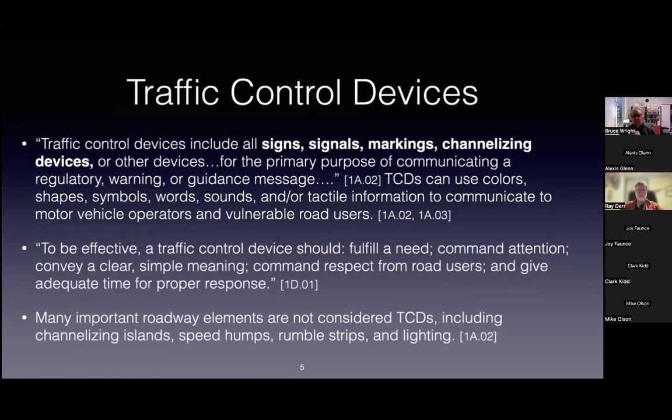By and large, the MUTCD does not require the use of a particular traffic control device. It just talks about if you're going to put in a traffic control device, this is how it should be used. But the implementation decision should be made by an engineer considering the safety and operations for all users. Another item is that a traffic control device that doesn't meet the requirements of the MUTCD cannot be used without an approval to experiment.

There is a process—it is not an agile process, it is not an easy process—but agencies can request approval to experiment, and there is a way of going about that so they can try new things.

Once the MUTCD comes out and gets updated, it takes a while for all of those devices which may no longer be in compliance to get updated. So it's up to the agency, whether that be the state, the county, or the city, to set up a program—typically on the maintenance side—to go out and, when they are refreshing their traffic control devices, bring them up to standard.

Traffic control devices in the MUTCD have to be in the public domain, because the federal government doesn't want to be putting out a requirement that everybody go out and buy a device from a particular vendor and put them into a proprietary situation there. So that's where that comes up.

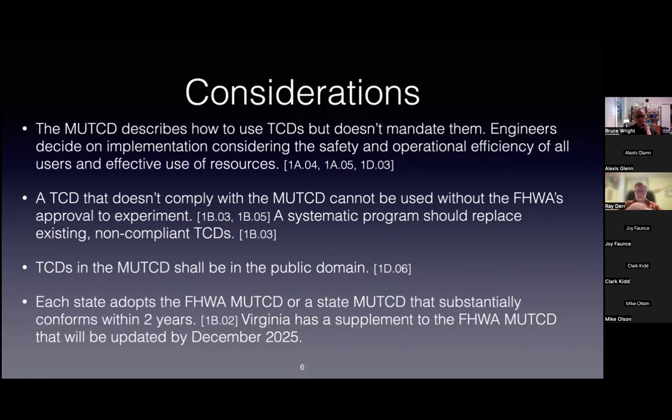Let me just pause here real quick to see if there are any questions about the purpose and scope of the MUTCD. Yeah Ray, just let me chime in—questions are welcome here, and while Ray's doing his talk, he said he would take questions on each of the slides. We'll try to get through them quickly, but if you do have questions, you could either raise your hand or put the question in the chat, and Alexis and I will try to get to it. But go ahead if there's any questions.

Now's a good time in general. The rest of it's going to be dealing more with specific devices, so I think you're going to be more interested in that. If not, we'll move on.

Mary has a question asking if the signs are expected to conform to the Americans with Disabilities Act. Yes, that is certainly required. Everything on the pedestrian side has to comply with ADA. That is a civil right, not to be questioned. Agencies just have to do it.

One of the big things that's taken several years is to implement curb ramps. That's been a real resource problem for a lot of agencies. But at this point, hopefully we're pretty well along as far as getting all sidewalks having curb ramps at all intersections. ADA is required, I think that's it.

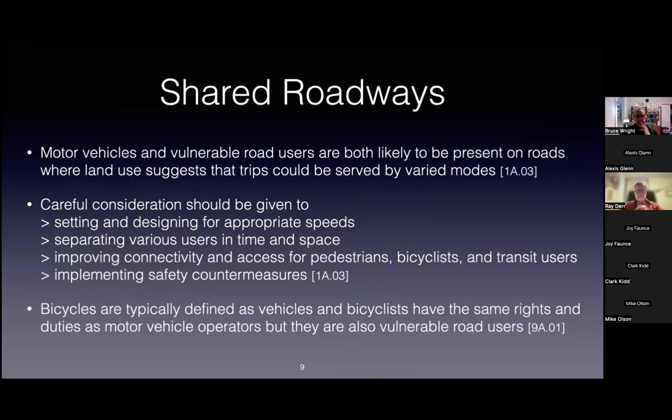One of the big changes in this manual is dealing with speed limits. If you had any knowledge of the MUTCD, you're probably familiar with the 85th percentile speed and how critical that was in terms of setting speed limits. With the new manual, it specifically says that on urban, suburban arterials and rural arterials going through a small town, the 85th percentile is not as important as it has been in the past.

So the agency, the engineer should be looking at alternatives, taking more things into account than just the 85th percentile speed in terms of the speed limit, and also should be looking at speed reduction countermeasures, because just setting a speed limit really doesn't do much to change how drivers proceed. We really need to do something more to get them to travel at a reasonable speed, the speed we'd like for them to be, and certainly as bicyclists, the speed we'd be more comfortable with them at.

Ray, does this apply to VDOT, or do they have to adopt it formally in the next couple of years? Because we would love to see them use this now. They do have to adopt it, they have 2 years to adopt it.

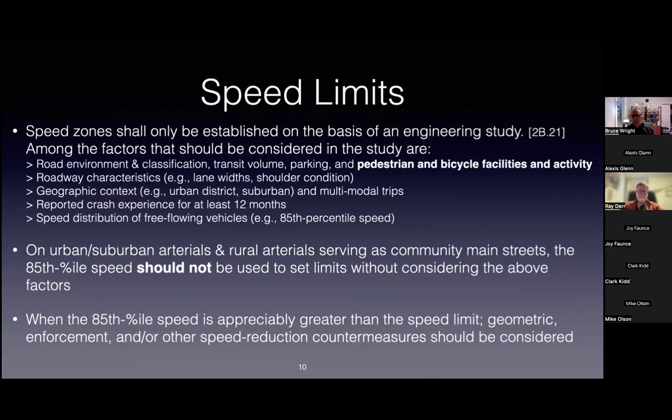So a couple of things here about bicycle facilities. As you know, green colored pavements and markings are designated for bicycle lanes and facilities. There is information in the manual on, if you have a situation where people are parking in the bike lane, you can put up some signs to try and discourage that. There's a diagram talking about angled back-in parking, and it says it's common to improve visibility of bicyclists. I'm not sure if that's new, but I would think it is. I know some places have done angled back-in parking to help with the visibility.

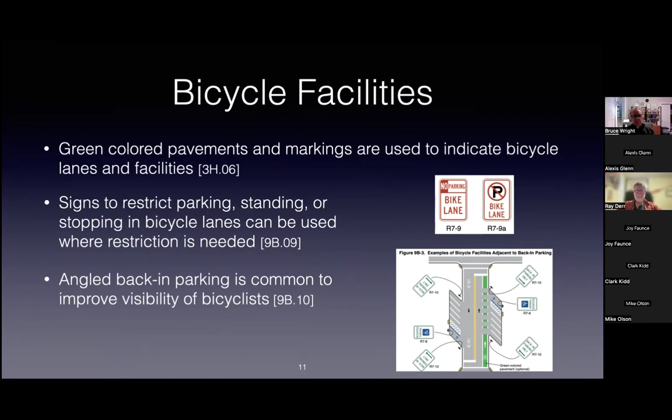Also covers buffer separated lanes, and gives several examples of those. I've got a couple here at the bottom. You guys know the county a lot better than I do, so I'm not sure how much mileage we have as far as buffer separated lanes in Fairfax County. But certainly that is a much more comfortable, much safer, much better environment for bicycling, and it's a lot more likely to get people out there using the facilities.

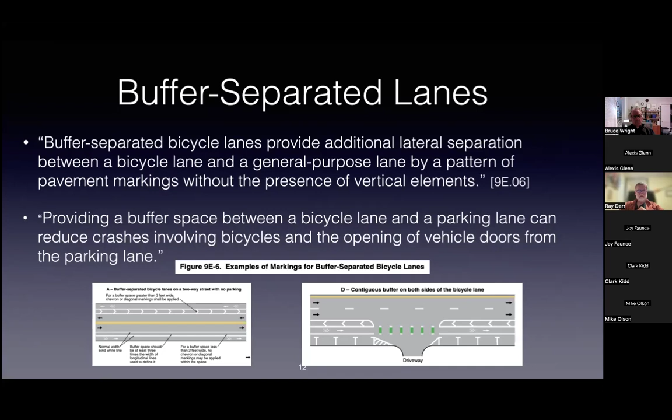And then separated bicycle lanes, like buffered, but providing even more separation, a little more as far as vertical elements to help separate the bicycles from the motorized vehicles. One of the things that happens here, in the little diagram on the right, it does bring in the protected intersection. Probably seen these from the Netherlands, other places. So you can actually carry the separated bicycle lane through the intersection, closer to the intersection than the crosswalk. This is something I'm sure is new in this manual.

Separated bike lanes are what we want to see, and VDOT has been very reluctant, partly because they claim that maintenance is more difficult, which it might be, but if they had the right equipment, it wouldn't be. So I think they're changing gradually, and there is one now in front of the Vienna Metro station that is truly separated, but it's one of the only ones. So hopefully before too long, we'll get more of these.

I think so. But I will say that that separated lane by the metro station was not cleared of ice and snow. So when VDOT says that maintenance of it costs more, I suspect so, because to me, at least in my knowledge of it, unless Mother Nature melted all that snow, there was nothing done there to remove snow from those lanes. Yeah, that's a big problem.

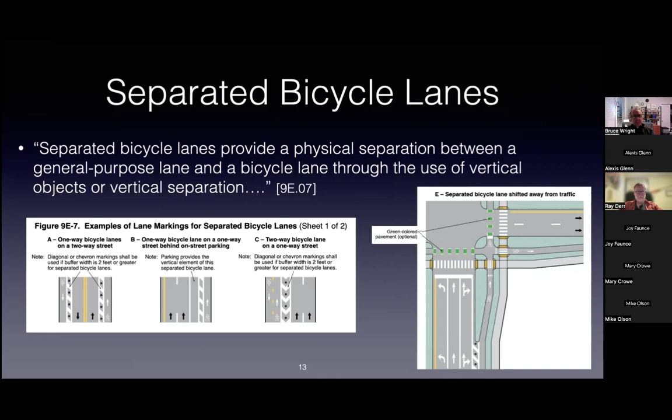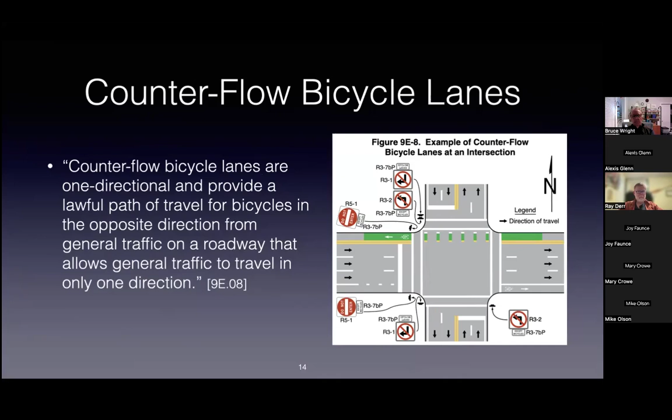Counterflow bicycle lanes are covered. I'm not sure we've got a lot of those - they're more in DC, but in the district, bikeway signs, there is a lot more in terms of that.

As far as laying out standardized signing so that, as you're traveling around, you have a better sense of where you are - so once again, like the cross-county trail, that is a sign which has to be in compliance with the MUTCD, and I'm sure it is.

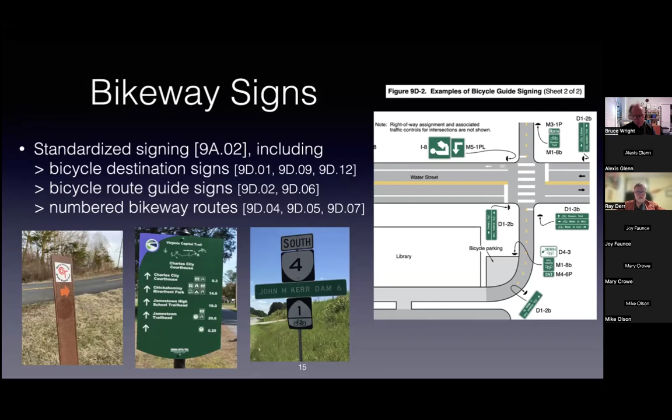So, signalized intersections for bicyclists - I'm not sure if this is new or not, but basically as far as doing the analysis of whether a traffic signal is a good idea, bicyclists can now be considered as either vehicles or pedestrians. So it gives another option for doing that analysis of whether a signal would be an improvement.

There is more on the bicycle signal faces, and they do cover what the meanings of the steady and flashing bicycle signals are.

And then they've got several pages of examples of different types of bicycle lane transitions as they approach intersections. These are not just for signalized intersections, but it was a convenient place to put this type of information. So I'd say there's quite a bit more now, including there on the bottom right, where you've got some separated bicycle lane and how to handle that with right turning traffic.

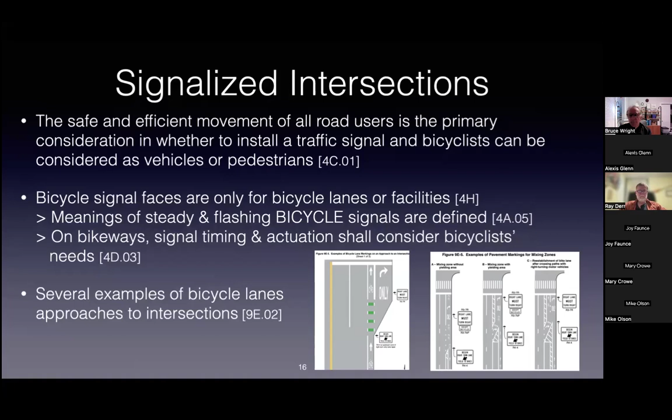Bike boxes are covered, both for turns and also to get in front of the vehicles to be able to get out there quicker. So those are laid out.

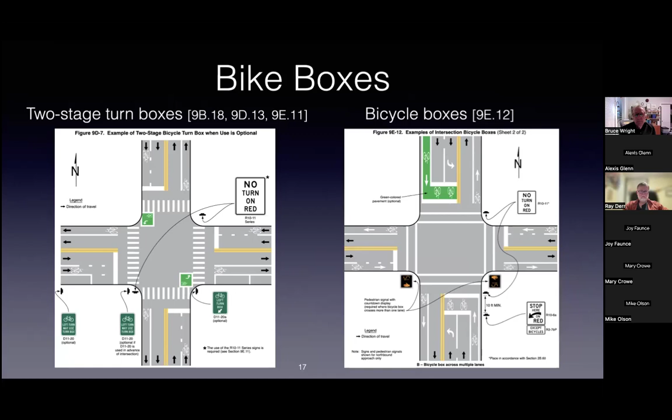So once again, the MUTCD doesn't require that any of these devices be done, but just having them in the manual is going to help when you are talking to the agency, in terms of pointing to an example which can help with the discussion.

For stop and yield intersections, where a trail or something is crossing a street, the first couple paragraphs talk about how in some cases it might be worthwhile or beneficial to give priority, the right-of-way, to the bicycle traffic rather than the vehicular traffic. And that's something I think could happen in several places around here.

The one at the bottom there - when priority is assigned, the least restrictive control that is appropriate should be placed on the approach. I know this is something we just talked about in terms of the proposed state law, but there are a lot of places where stop signs are up and yield signs would be definitely sufficient.

The stop signs are just being ignored by me and you and other bicyclists, and particularly where you've got good sight distance, there really just isn't a need. I'd rather see those stop signs reserved for places where you actually do need to come to a stop to be able to see the traffic.

Quick comment on the first item, giving trail users priority - folks at Bike Falls Church are trying to get that implemented on the W&OD Trail, where there's a number of very low volume neighborhood streets that the trail crosses, and there's more traffic on the trail. So this will certainly help with that argument.

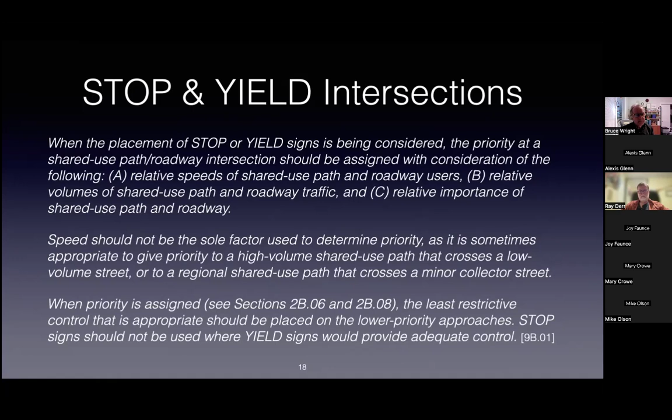Roundabouts. Bicycle lanes are not allowed in the circulating roadway of roundabouts - there's a lot going on there, so that's just as well.

If you haven't ridden a roundabout, single lane roundabouts are fine as far as going through on a bicycle, I think. I think most people are fairly comfortable - the speeds are low, everyone is yielding to each other, so it does help.

For multi-lane and higher speed roundabouts, though, they do talk about separated bike lanes possibly being beneficial. And then also at the crosswalks of a roundabout, there is more in terms of the actuated types of controls which can be used at the crosswalk to help notify drivers that someone is crossing there.

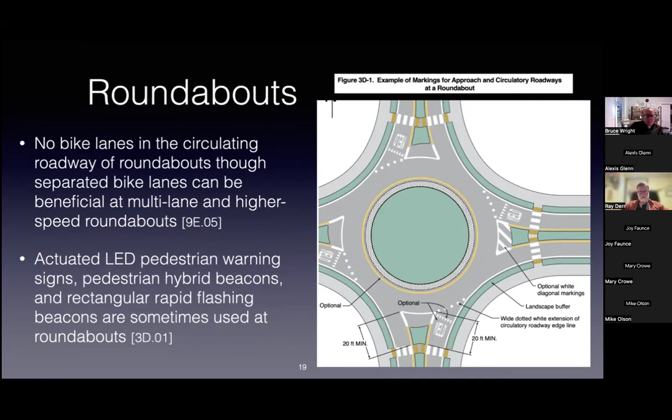So a little more as far as crosswalks. It does talk about the fact that at mid-block crosswalks, the engineer should be looking at how to make that safer, enhancing driver awareness. You can read the rest of the stuff there.

The diagram does have a setback distance for a yield line there on the right to help lessen the multiple threat problem. It also talks about how rectangular rapid flashing beacons and pedestrian hybrid beacons can be used at road crossings. I think we've got a lot of RRFBs within the county.

That's the first picture there on the left with the crosswalk and then the trail crossing. The pedestrian hybrid beacons, I don't know whether we've got any in Fairfax County, but those are a little more restrictive.

In terms of if you come up and push the button, there will actually be a red signal come up for the drivers telling them to stop. And then it goes into a flashing red during the clearance type of phase, so then the drivers can proceed through after stopping.

Ray, it sounds like that's a HAWK signal. It was called a HAWK, yes. There is one in Vienna on 123, and there's another one in the county somewhere, but they've been reluctant to use those. I think they work great. They're better than stoplights because motorists, when there's no pedestrian or cyclist, can proceed through the red light. They work great in Tucson, Arizona, I know.

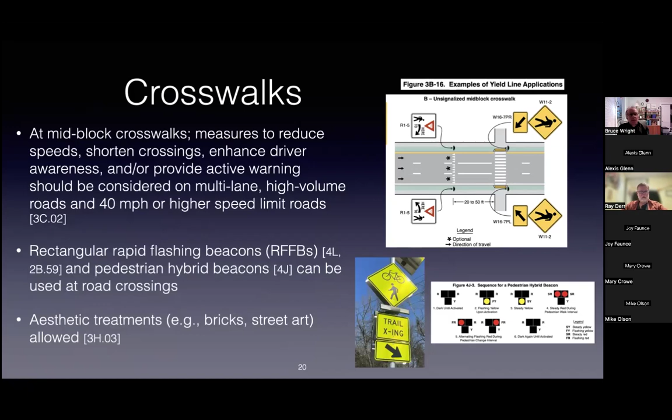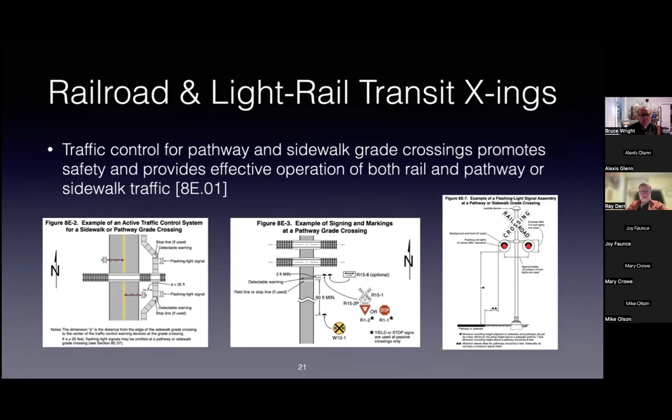There is material on railroad and light rail transit crossings, and several examples of that within the MUTCD. So this is certainly not an uncommon thing to happen, and it's not ignored.

And then work zones, you might remember as far as those parts of the MUTCD dealing with various contexts, work zones was actually the longest one, temporary traffic control. But it does go into talk about the fact that if pedestrians and bicyclists are affected, then they need to be considered, things need to be done.

And there are several, I think there's 5 different examples in there as far as different figures showing how the bicycle and pedestrians could be—well, I'm sorry, this was just for the bicycles. Pedestrians, there are more examples of that too. And it includes things like rerouting a bicycle route around different streets, doing a detour.

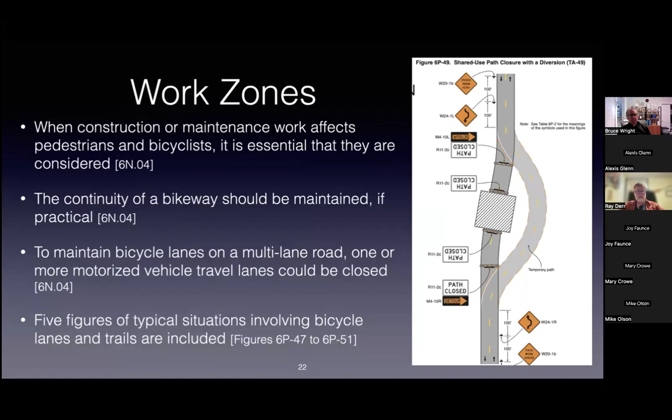And it does talk about, the third bullet there, if you do have a multi-lane road and perhaps the vehicular traffic is not as large, you could close one or more of the motorized vehicle traffic lanes in order to provide a bicycle facility there in the work zone.

So I started out, each state does have to adopt either the federal MUTCD or adopt their own version, and they've got 2 years to do this. I did quickly look at the current Virginia supplement, and it was largely just taking material from the federal manual, but then taking some stuff out based on state law.

For example, the federal manual has a sign that's in the roadway saying yield to pedestrians in crosswalk. There is a state law saying you must stop for pedestrians in crosswalk. So the Virginia supplement just eliminates that one sign and says that cannot be used in Virginia. So this is the type of thing that Virginia will be looking to do when they're doing their supplement.

But there is a lot of new material, and so they're going to be doing a lot as far as reviewing that to figure out what they might need to deal with. After they get through with that, they are going to need to update their design manuals, their standards, because for every project they've got standard plan sheets that are going to need to be revised. There's going to need to be new training for all of the staff dealing with these situations. So it's definitely a big undertaking to incorporate a new manual into practice.